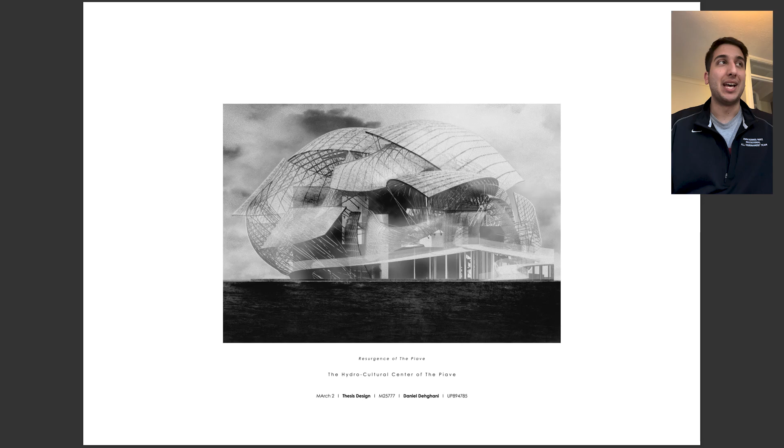So as you guys can see, the title of my project is Resurgence of the Piave, the Hydrocultural Centre of the Piave. And this was such a challenging project at the start, but as we go on, we can obviously see the development that it went through.

So I've got the contents page, the narrative, editorial, site analysis, how a river breathes, design conceptualization, particle simulation, some precedents, project development, some more precedents, and concept progression, proposal testing, scheme progression, materials, and then the drawings: the site plan, the short section, long section, all the elevations, health and safety, fire and accessibility for RIBA and ARB

criteria, environmental strategies and sustainability, technical and structural principles, the landscape engineering, aerial atmospherics, perspectives, and the final collage render I did of the true impact. So we'll see what that is at the end of the video.

So to start with, the narrative of the project, I'm going to read it. I've already read it in previous videos, but I'm going to read it again because it's really crucial. The objective of my scheme is to bring fresh water and sediment from the river Piave into the lagoon. The condition of the lagoon and the health of the ecosystems depends on the influx of sediment and fresh water. Therefore, it is crucial to design a highly sophisticated and well-orchestrated architectural scheme to perform these actions.

The client for the project are the citizens of Venice, to bring the Venetian people together to work on conserving and restoring their lagoon. The clients also extend to fish farmers that live and work on the lagoon. The designated site is within the Venice Lagoon near the village of Capo Sile in the municipality of San Donà di Piave, with the river Sile bordering the land and the lagoon. In order to combat the rise in sea level, it's time for the profession to create interventions which respond to climate change threats.

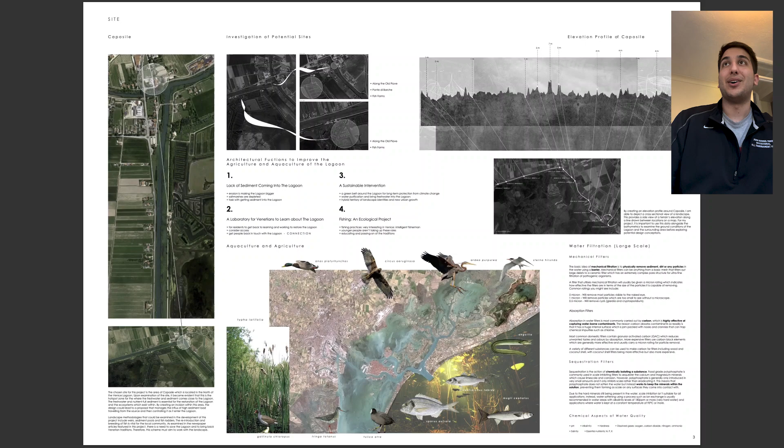Some site analysis, choosing where the best site is for this project, after identifying that this is where the river comes and meets the lagoon, and it's bringing all of that fresh water, all of the sediment from higher up to lower ground. Now this is the optimal zone to bring in that sediment and that fresh water to replenish and restore the ecosystems within the Venice Lagoon, identifying some of the agriculture and aquaculture, the water filtration processes that go on, and an elevation profile of Capo Sile along the river Sile.

Some initial site analysis, a combination of primary research from myself, looking at some of the information online about Capo Sile. In addition to that, the information that we were given from Dr. Camilla Bertolini, who was a guest lecturer in our studio, who gave a presentation on the research that she's been conducting of the lagoon.

And it was very interesting, and there's so much information to just filter out and take what I needed. I mean, effectively I needed all of it, but to be specific to my project and my aims, I took the Lagoon of Venice is in rapid evolution, the stats from that, and the challenge of the bathymetry in the Venice Lagoon as well.

Pictures of my site model, the physical site model that I created, and some additional smaller models that you've seen me make in previous videos.

And finally summarizing this page up by some landscape engineering techniques, the weirs, sediment pools, fish ladders that I've been using and integrating in the scheme that you'll see, and the long-term ambitions of the chosen site, which is to create an architectural intervention that improves the health of the lagoon, work with the landscape to produce a scheme that meets the future needs of Venice,

design to protect and conserve the ecosystems within the Venice Lagoon, integrate the architectural outcome with the existing site to emulate the delicacy and fragility of the lagoon, and finally to produce a design that acts as a manifesto for how design should respond to current and future climate threats.

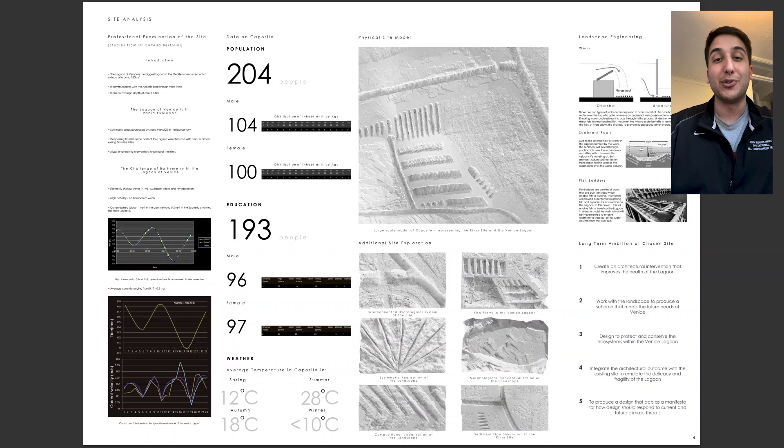And I wanted to create this page of how a river breathes, and it's kind of coming together, a merge of lots of different information that I previously studied, including obviously the site itself, sediment particle simulation, the history of the site, the Piave as a greenfield site, technical exploration of the Piave, and like I said, the river restoration techniques, which I went into greater depth, and there's more pages on that in my design diary, but just for the sake of the portfolio, narrowing it down into much more concise points.

And how a river breathes, and this kind of not famous but infamous in my project, that rivers are surprisingly a large source of greenhouse gases, and water pollution makes their emissions many times worse. So using that statistic to drive the project into how the scheme is very much centered around water. Effectively, it's crazy how we've gone from producing a scheme for people to producing a scheme for the landscape that then meets the needs of the people.

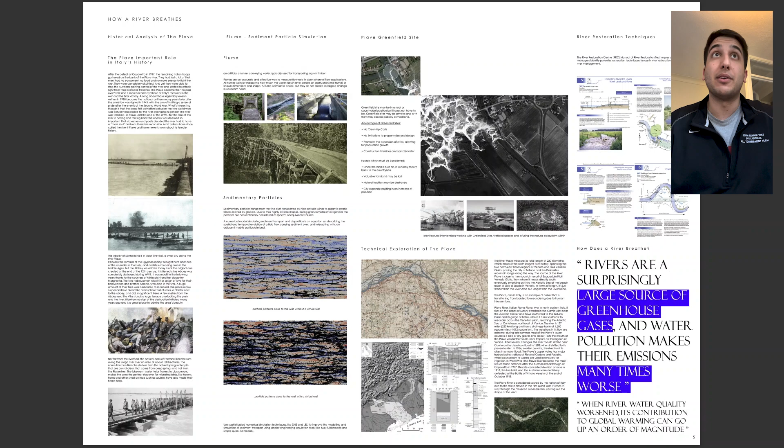And by putting landscape first, the effect from that is greater, and the benefits of that for the site, and effectively, as it says, using the project as a manifesto for future schemes as well, globally.

Design conceptualization, the strategic master plan AXO I did, not really AXO, but the AXO type diagram of extrapolating the data, identifying zones within the river, what they mean, what it means for my project, creating a collage in the Matthew Rangel style, theoretical collages I did earlier on in the project, and of course the one on the right that you can see, this is the key image, the key diagram illustration that I created, that the project was kind of born from, to be honest.

And as it says at the bottom, think global, act local. This is a time in architecture, a time in our world that we need to be working in this way, and in recent decades we have seen this copy-paste culture within housing, this copy-paste culture in architecture. We need to be braver, we need to be putting our ideas out there, and this notion of multidisciplinary and collaboration needs to be stronger, and it needs to work in the best way possible to produce benefits

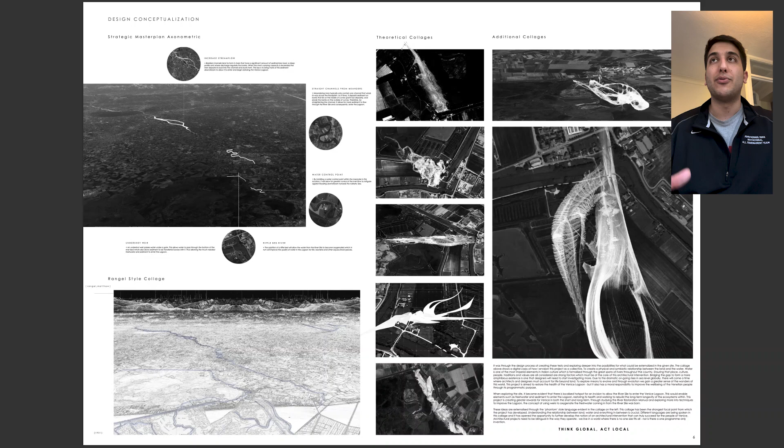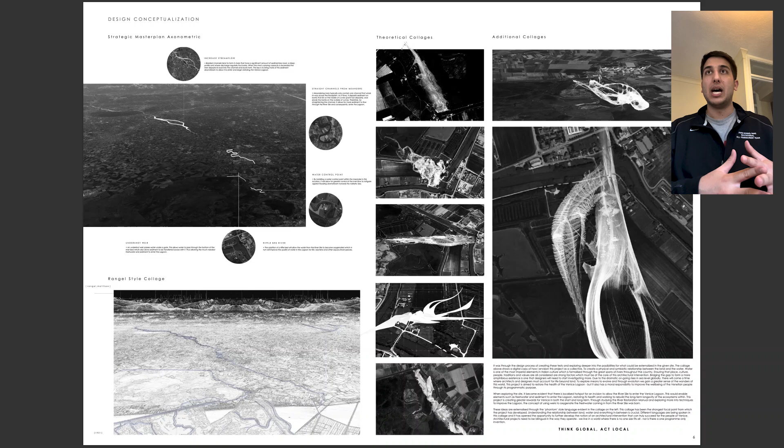for the world. And as we think globally, and how we can bring sustainability, how we can bring all these different factors together, especially when it comes to construction as well, the choice of materials, the choice of techniques in order to build the buildings, we need to have lots of these mini projects going along all around the world that work together in a way.

Yeah. Particle simulation, you've already seen me discuss this in previous videos, and that process, and how that also led on to the factor of sediment flow and sediment pools, which are going to be important for my project. And it's all about the process the water goes through, and not only that, but the tool that water is in this project in order to bring that sediment. It's acting as a figure of transport and a figure of connection between, yes, land and water, but it's a connection between the current state of the lagoon and the future health of the lagoon.

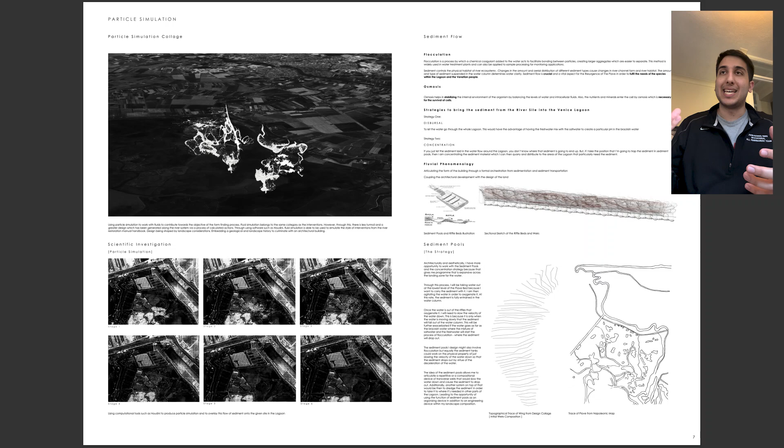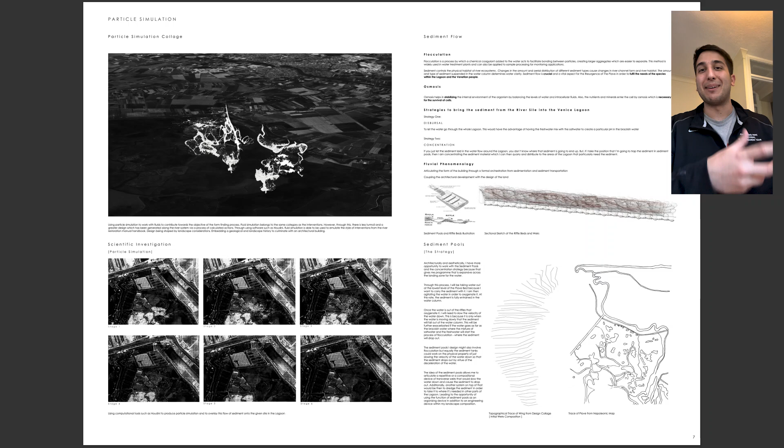And this sediment is coming to replenish the lagoon, and it's so important that earlier on in the process I found a way in order to extract and bring in the sediment, bring in the fresh water, and then architecturally, how can I articulate this into a building, and what does that mean not only for the people but for the site as well.

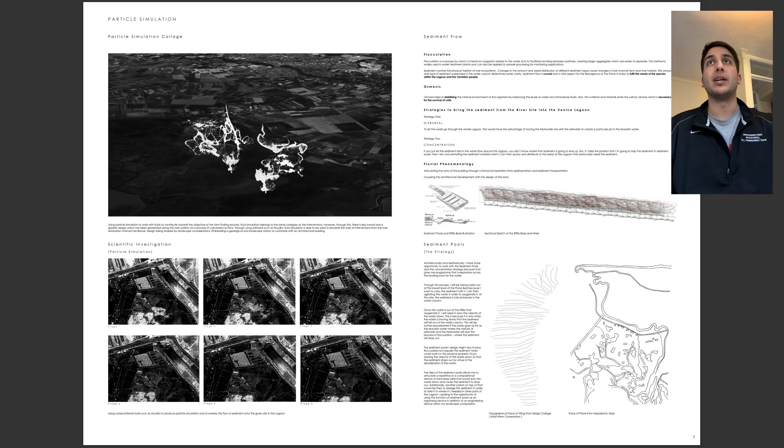Undertaking some initial precedent studies of AMID.CERO9, the projects that they've been conducting at their firm, I think is quite extraordinary, and really trying to look at these three separate projects from a couple of different angles. Firstly, being artistic and aesthetic: okay, how is this working? How is it actually relevant to the site? And what are the architects trying to convey?

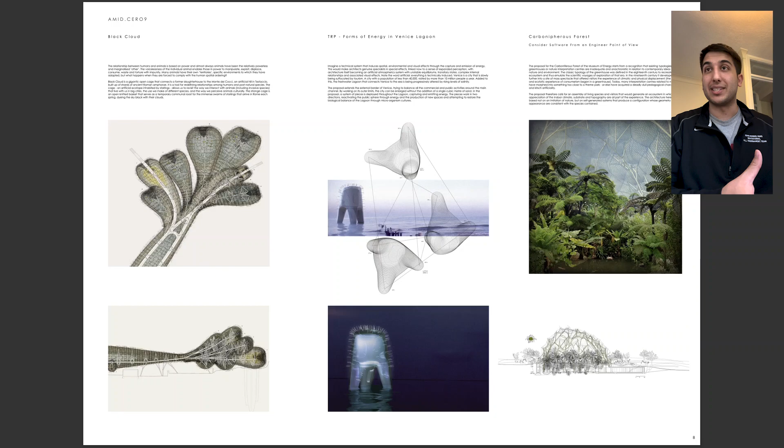And secondly, scientifically and technologically breaking apart these projects. How are they being embedded in the site? How do they work? What is the formula, the equations that are going on in order for these to operate effectively? And what can I take from that to benefit my project moving forward?

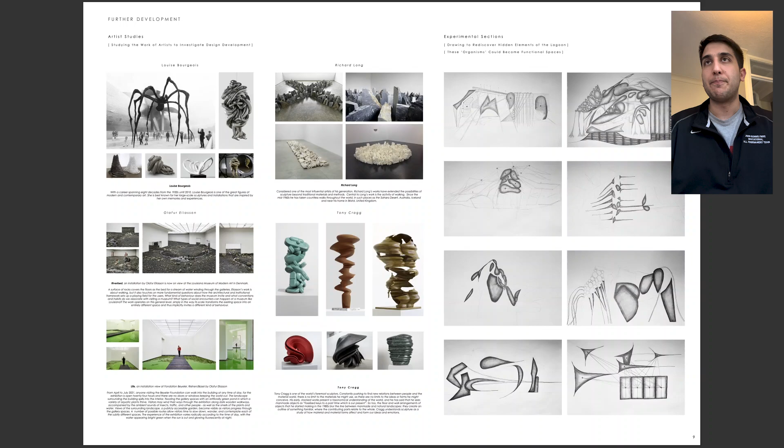Further development, looking at the work of artists, looking at the work of sculptors, then conducting my own investigation into how I can be visualizing some of these spaces, as you can see on the right hand side. And then again, experimenting through layers. This was such a long process within the project. Testing, trialing, putting these layers on top of each other. What do they mean? What does this convey? And what is it about this information that is truly going to be benefiting the scheme as a whole?

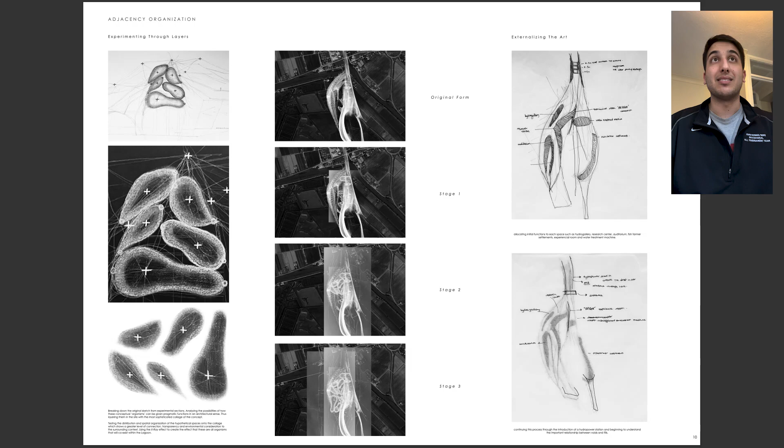And once you understand that, by not limiting myself in the earlier stages, I think this led to greater creative flow and creative growth. And creative growth also led into the scientific elements that I then explored later on throughout the year, that then led to all of these different aspects, all of these different elements culminating into one scheme that works, in my opinion, quite cohesively.

The programs: we have the lobby, the cafe space, research center, museum of flooding, education hub, auditorium, and the fish farmer settlements, and the landscape aspects of this project being the weirs, the sediment pools, and the fish ladder, that are all going to be working in harmony together to effectively work as the manifesto of my project, and to complete the ambitions and the aims of my project, which were to restore the health of the ecosystems within the Venice Lagoon.

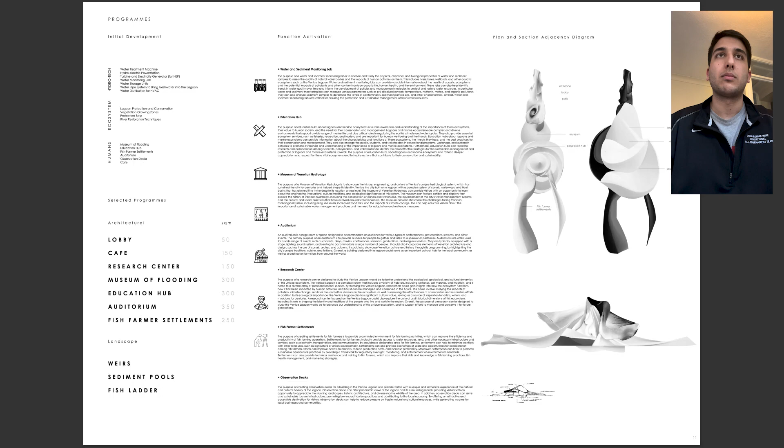And I was trying to do some abstract plan and section adjacency diagrams earlier on to identify these zones. And once a form was created, I used it to slice through and look at the volumes in different ways, analyze them. What does it mean? Spatial organization diagrams, using the Rhino model to look at the form, and how can I cut this up. And I created, as you can see, the volumetric sushi section, as I called it. And this was another key point in the project.

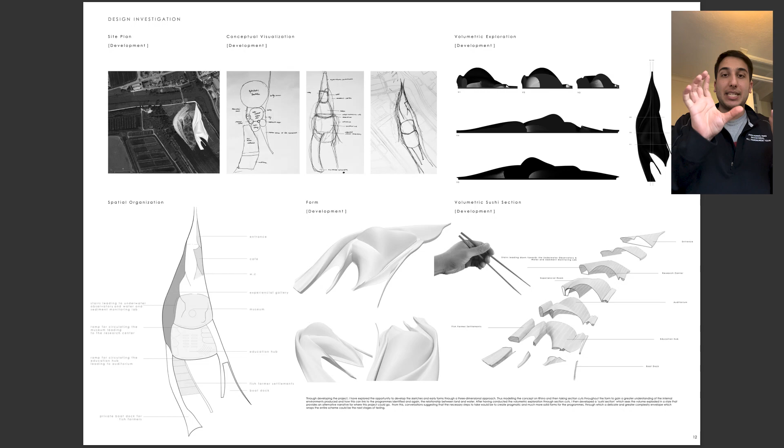Yes, I didn't go with this form, as you'll see in the next slides, but by cutting up the volume, this then led to another factor, which was a breakthrough point. Let me just quickly say before I move on to the LV Foundation, by breaking up this volume and seeing it in different segments, my tutor then had a discussion with me to say, you know what, now is the time that you have to think much more pragmatically. And what he means by that is designing spaces that aren't going to be structurally complicated to construct. And of course, the limited time we have in architecture school to design as well.

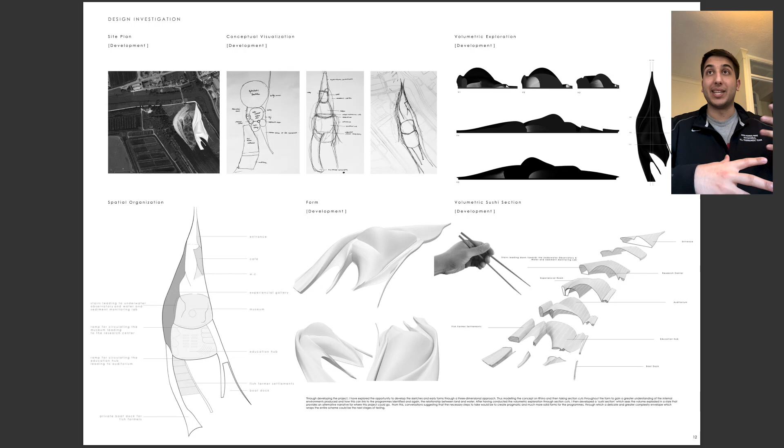So think of the spaces much more pragmatically, but think of possibly the envelope of how this is going to be delicately wrapped, so that you could then bring back these notions of fragility, delicacy, etc. And this was such a, I don't want to keep saying breakthrough, but it really was a key part of my project, the LV Foundation. The way that Gehry designed this incredible building, in all honesty, I took for granted the first time I ever saw this building, and the first time that I was truly exposed to the drawings.

I mean, I was exposed to the drawings years ago, but studying them this year for this project was a completely different level. The way that the project has been engineered is truly out of this world. Using the building as one huge, large foundation, which then inhabits everything else, and is then not covered but wrapped and dressed in this envelope that is so beautiful, is mind-blowing.

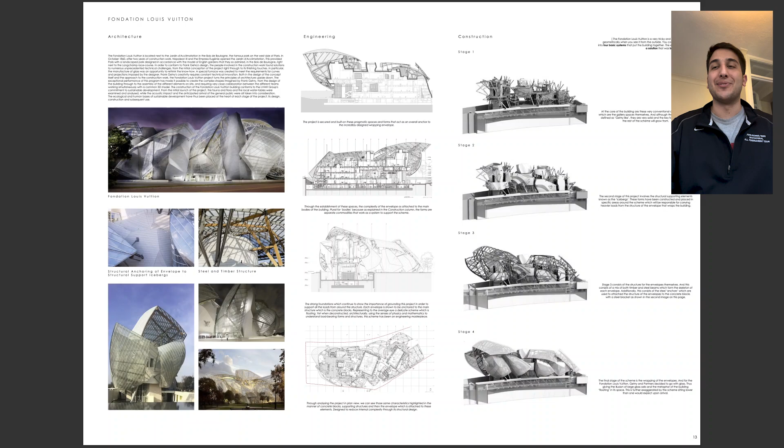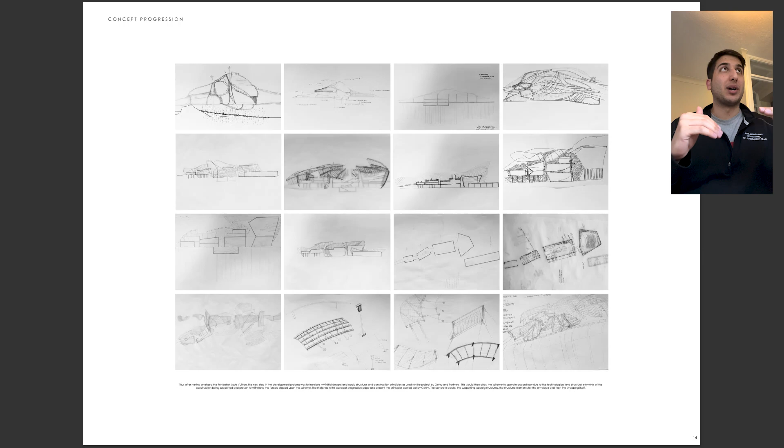So yeah. And then this led to the concept progression. What's meant by that is much more development, sketching, going back to the earlier forms of the volumes that I broke up, deconstructing those, as you can see, the initial plans that I created, working on those plans, looking at it from a completely different perspective through section mode. And then of course some quick illustrations.

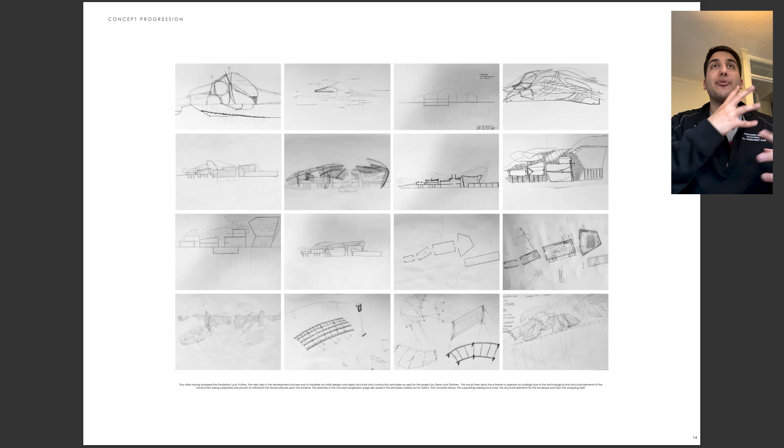There's more in the design diary, but keeping it concise for now for this presentation, into the structure and how it was put together, and how I can then emulate factors of Gehry's LV Foundation to best suit the needs of my project. And this led to the proposal testing.

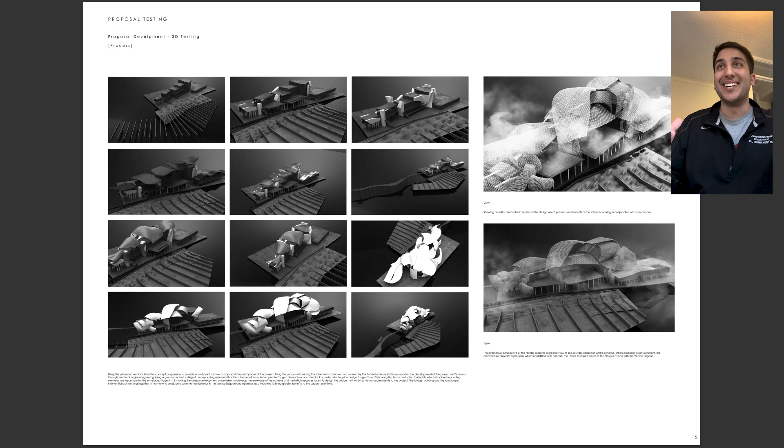You can see the iterative process that it has gone through from the concrete blocks. We see the icebergs being constructed, and a lot of time was given towards the wrapping of the envelope, and how this is then going to work in harmony with the landscape engineering aspect of the scheme that I've been introducing. This took a long while. This took quite the journey, back and forth, and some very, very long days, some very, very long nights, but we got it done.

And as you'll see in the final images and renders, I am pleased with the outcome of the project, and introducing the bridge as another form of entrance to the scheme is, how do I say it? I'll just say the cherry on top, in a way.

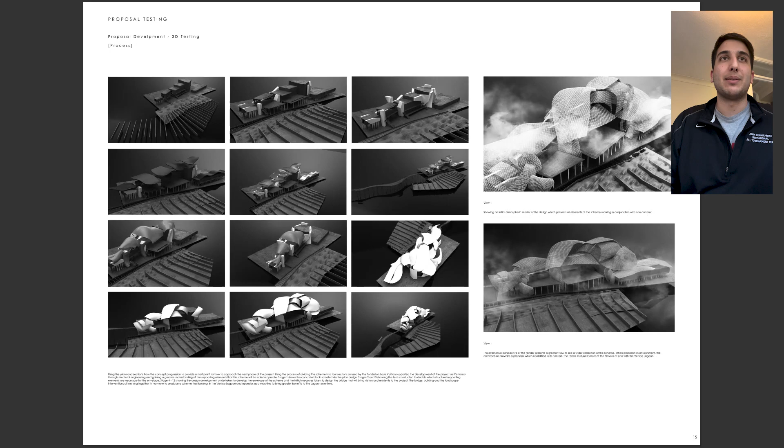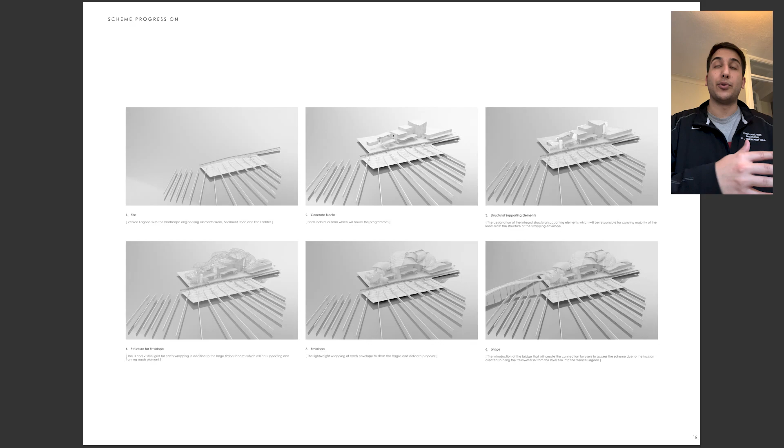And yeah, the scheme progression, again, seeing the site, the concrete blocks, the structural support elements, structure for the envelope, and then the introduction of the bridge, so that the users and visitors can enter at 2 different levels. Same experience, but obviously if you want to start on the ground, on the ground slab, you can. You don't have to go directly straight into the lobby. And it also provides an alternative route of entrance and exit, both for normally exiting and for fire escape means too.

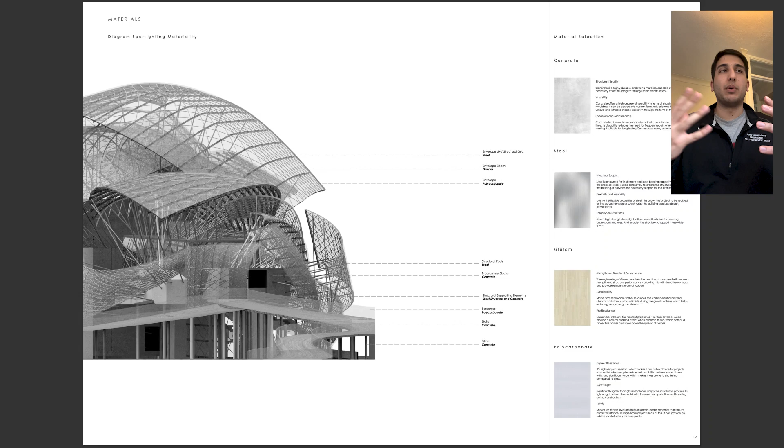Materials going with concrete, steel, glulam, and polycarbonate. There was a lot of talk between me and my tutor about using ETFE, but the cushions, the bubbles of ETFE just would not fit within the fragility and delicate aesthetic that I'm going for. So we move on now to the site plan. We can see the scheme in its location in the Venice Lagoon.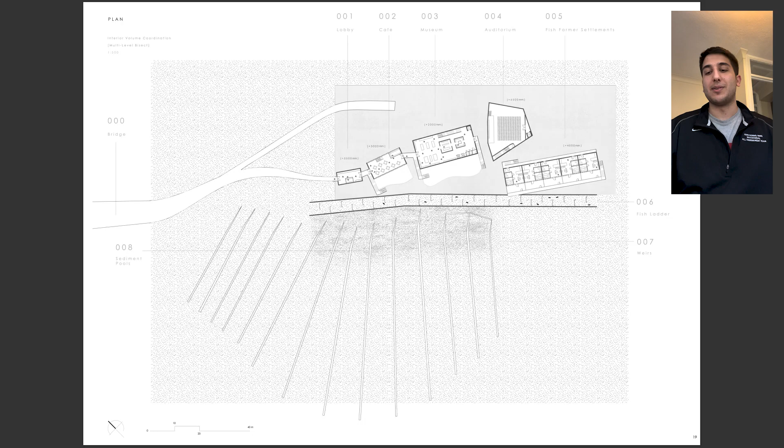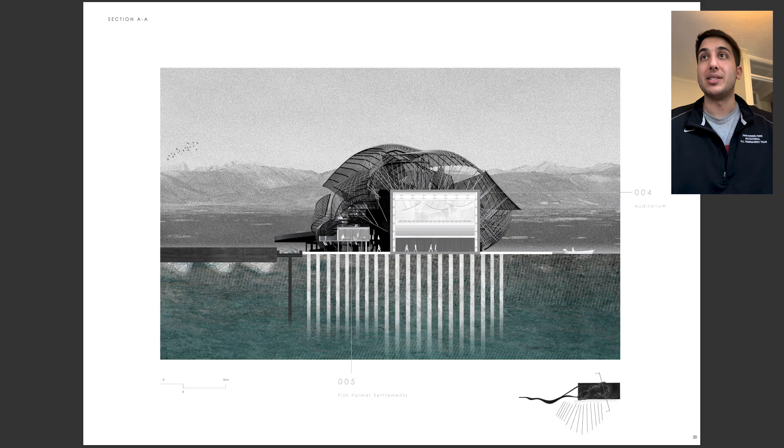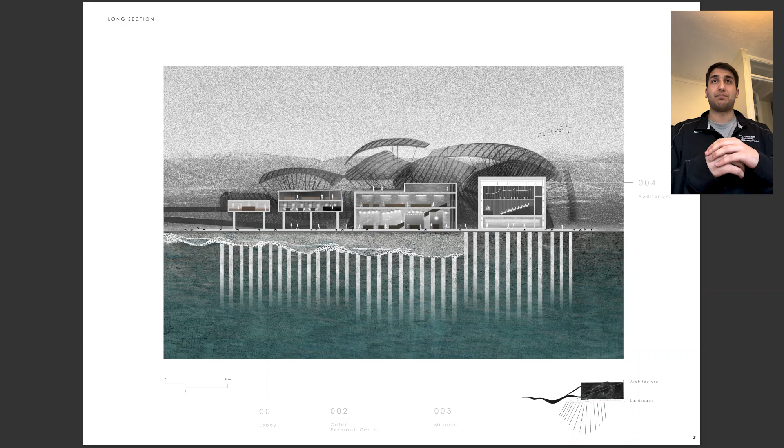And the long section now showing much more of the landscape. We can see the process of the riffle beds, the landscape engineering going on, the foundations of the building. Let me just double check. Yeah, you can see the foundations, the wrapping of the envelope. You can also see that in its entirety, and I think that's what also makes this project so beautiful.

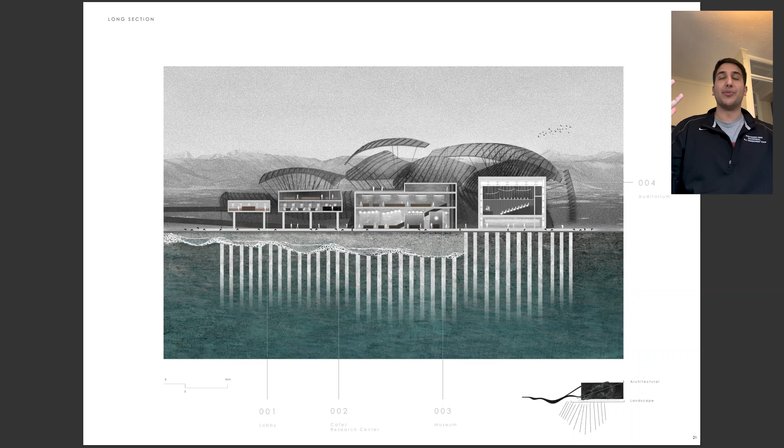It's at different levels that people are experiencing, even when they're outside, when they're on the ground slab walking around. They can see all of these different layers of the building, and it's the same process of all the different levels and all the different processes that the water has to go through to be filtered, bringing in the sediment, bringing in the fresh water. And I think all of it, the architecture and the landscape, truly just works in harmony.

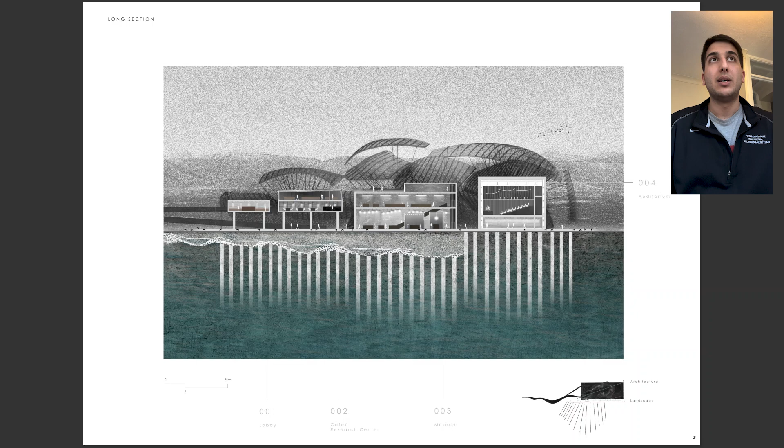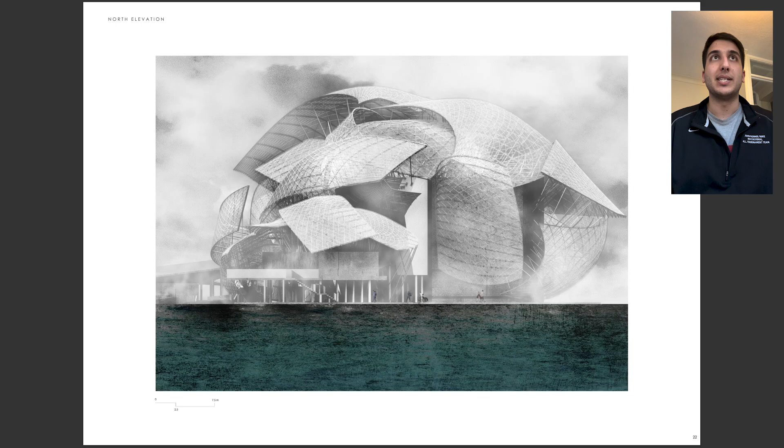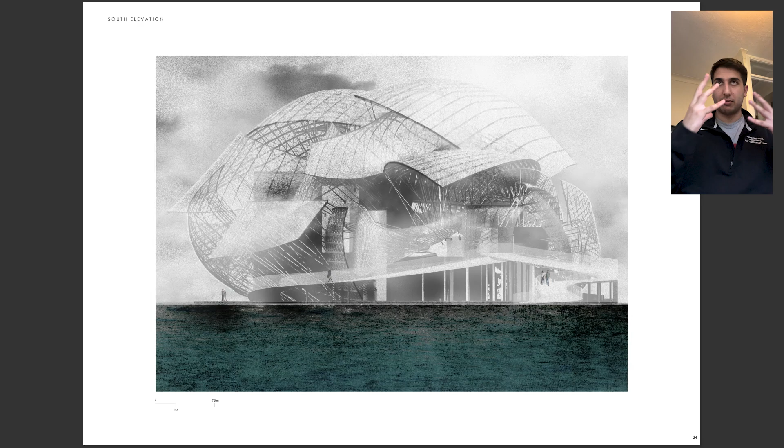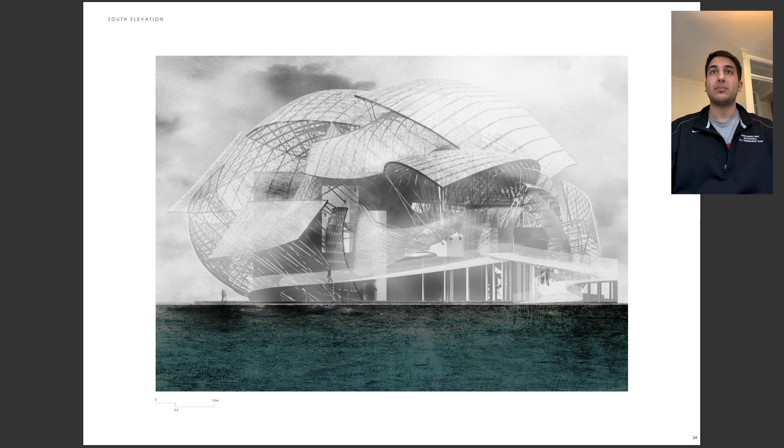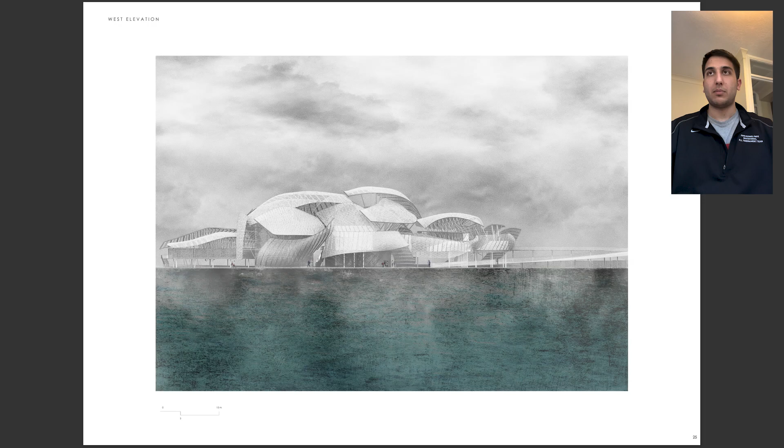The wrapping of the envelope. We can also see the structural elements of how the envelope is actually attached to the structural support elements and the concrete blocks too, and how people will be experiencing this in terms of scale. And the west elevation too. This is overlooking the lagoon, so we won't be able to see anything on that side, but it's creating this atmosphere of a foggy experience. I think this aesthetic works quite nicely.

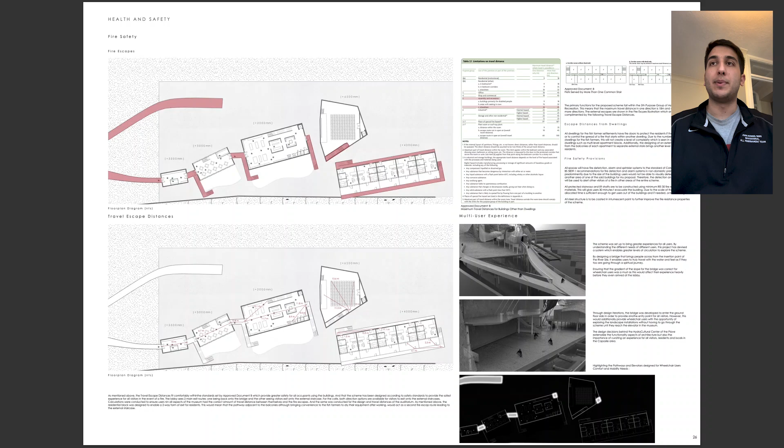Now moving on to the final bits, which is the health and safety regulations, travel escape distances. Looking at the Approved Document B and the multi-user experience diagrams I created. Environmental strategies and sustainability, so solar testing, explaining the reasons for the PV cells and how some elements of the envelope will be covered in thin film PV cells that will be generating electricity for the scheme.

The landscape, explaining again the fish, the sediment pools and the weirs, the ventilation, some cross ventilation happening, and of course the water collection system at some of the envelopes, bringing in that rainwater, which can then be reused for a couple of different purposes, such as washing and cleaning. The choice of materials, and then a small statement about the smart proposals that I'm going to be introducing to the scheme as well.

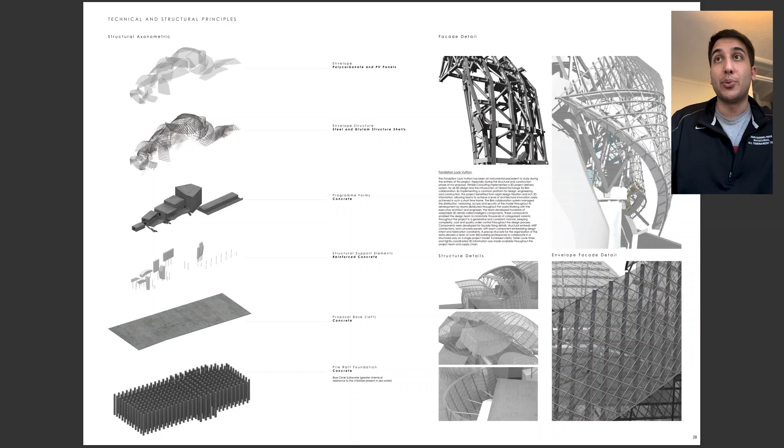The technical and structural principles, creating a structural axonometric of the different stages and parts of the scheme. The facade details, again referencing back to Gehry's LV Foundation and the structural details and envelope facade details of my own project. The landscape engineering, going back to those same three elements, and then showing this illustration of the sediment influx process, how the buildup is dredged by diggers and can then be reused in other parts of the lagoon.

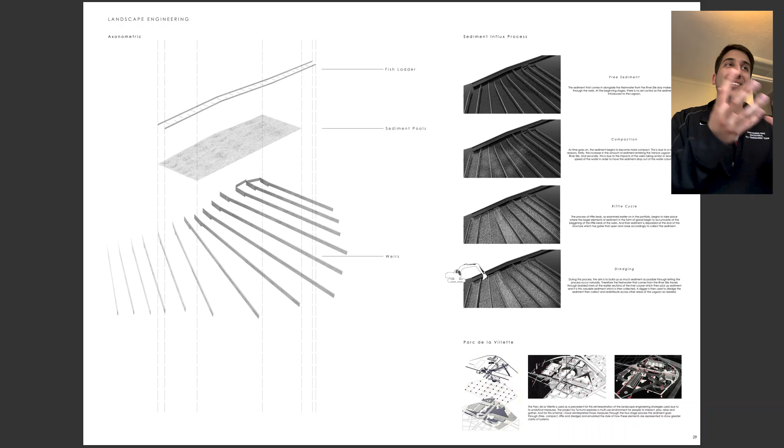Referencing quickly the Parc de la Villette by Bernard Tschumi, and not so much the project itself, but the way that the project has been represented in the drawings. That is something that I think architecture students aren't so highly exposed to. Yes, projects and their outcomes, but mainly how they're being represented, and how you can use representation styles for your own project despite the theme of the project being something completely different.

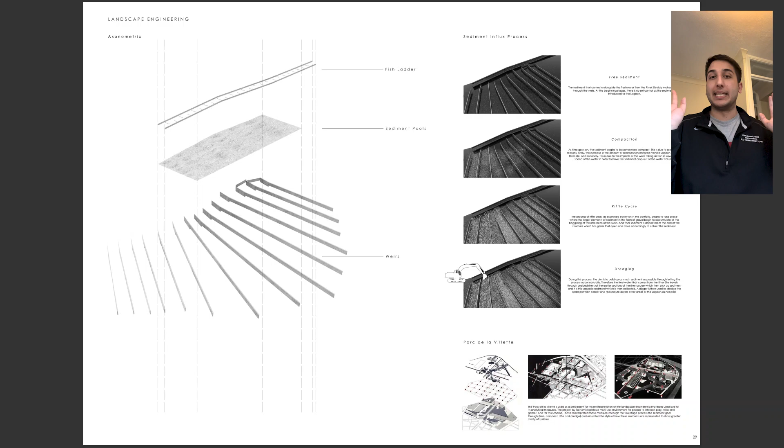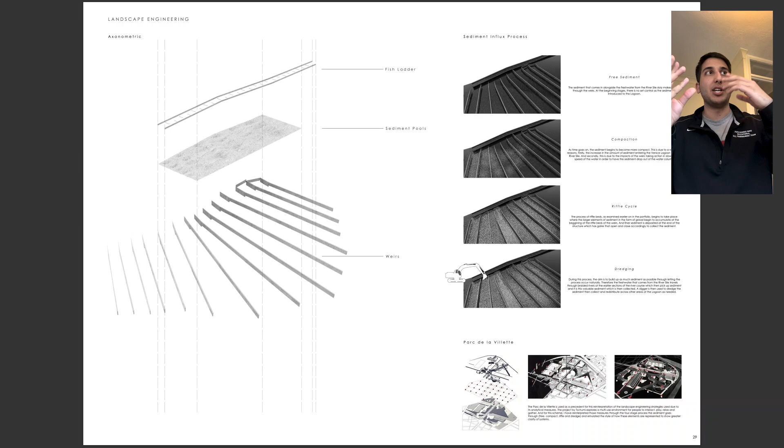And I think that's quite amazing, to be honest, how architects and designers as a whole can use another artist's work, not necessarily in relation to what they're trying to achieve, but in how they represent it and communicate it to an audience. So I just wanted to include that as a reference as well. And now we're moving on to my favorite part of the project, and my tutor constantly goes on about how I love to spend lots of time doing these drawings.

But this year I literally did not spend that much time doing these drawings, because a lot of my time and focus was placed on the architecture, on the engineering, the landscape engineering, and oh my god, Rhino and Grasshopper were just playing up this year, so that was a lot of my time and focus.

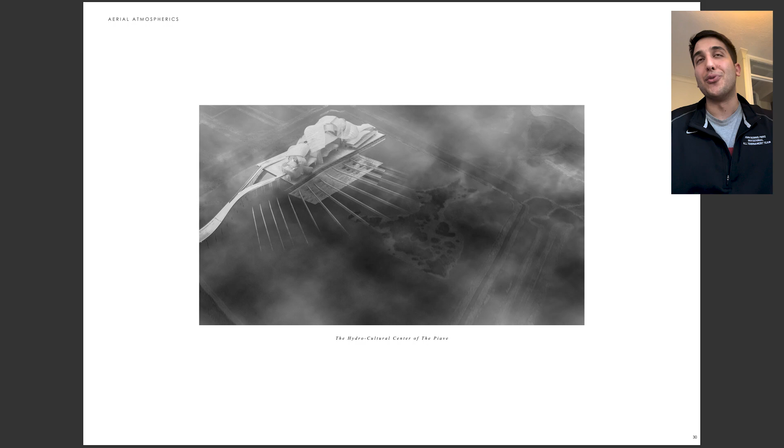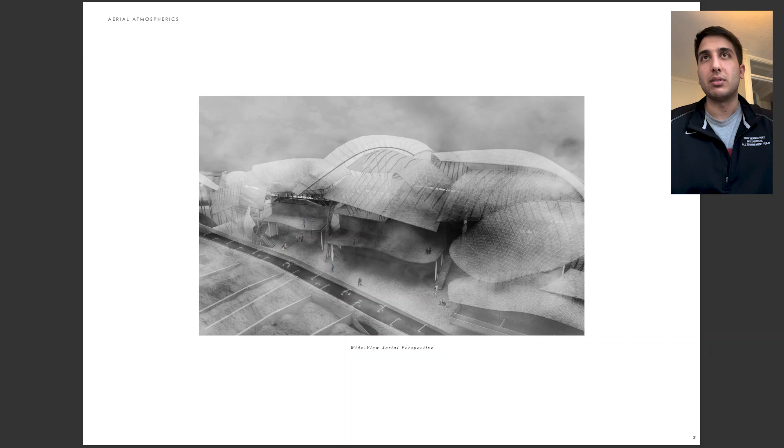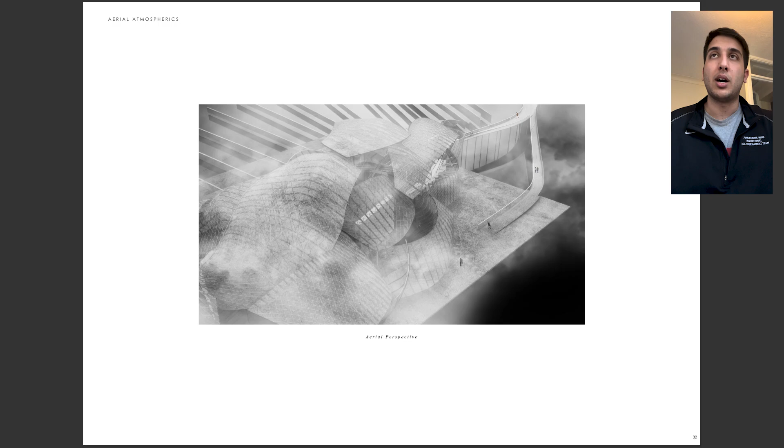So the aerial atmospherics start off with the first one, the hydrocultural center of the Piave, showing an overview of the project. The wide view aerial perspective where we can see many people experiencing the scheme, and the fish ladder and the weirs coming in. I think it looks quite nice because of, again, that fog, the atmosphere that I've been able to create in this process. Another aerial perspective where we can see people entering from the alternative route through the other ramp bridge, coming down towards the ground slab.

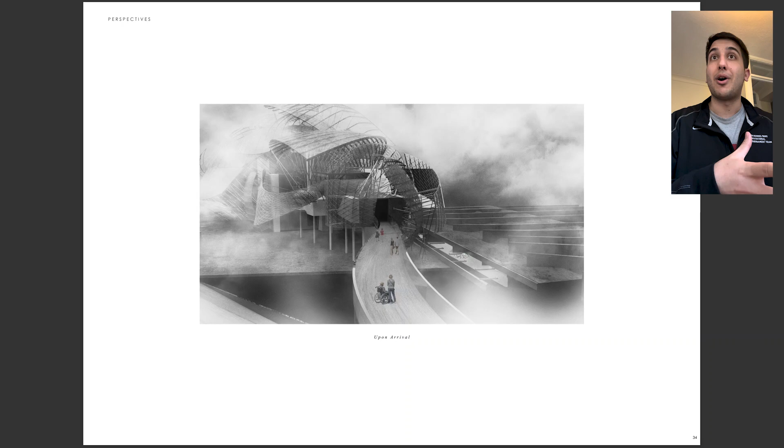Aerial perspective, the view from the fish farm settlement. Again, I think it's been constructed in a way that provides the optimal experience for all users of the space, whether you're a visitor, a fish farmer resident, or a resident of Venice coming to check it out. Upon arrival, I really did like this perspective, because it provides a greater understanding of what it's like to actually experience the scheme as soon as you arrive at the very front, like the start of your journey with the project.

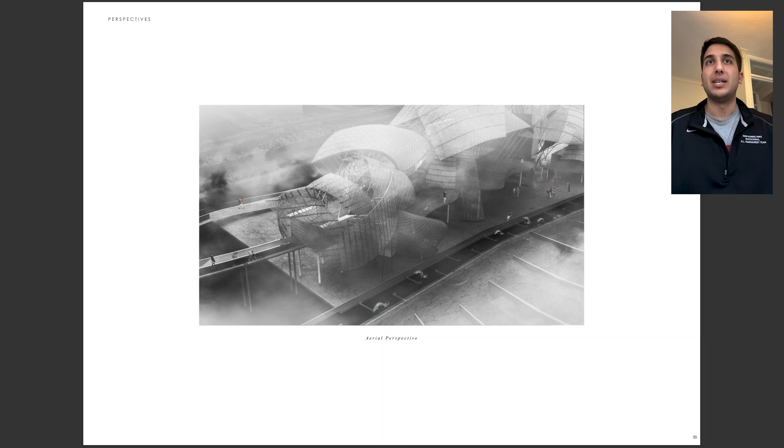Aerial perspective again, showing an alternative view, the fish ladder showing the fishes jumping up through the process. Bit of the lagoon in the background, and again bringing in that atmosphere to truly show off how delicate and fragile this scheme is with its environment.

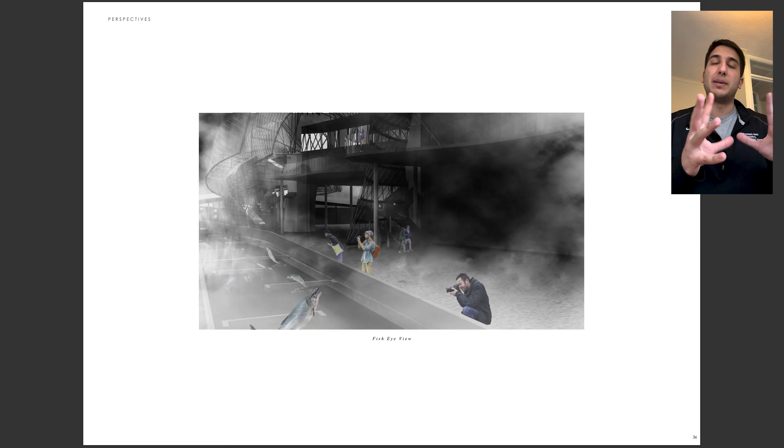Yeah, I called it the fish eye view, not technically a fish eye view, but I wanted to bring it to a much smaller scale, much more close up of how the users will be experiencing these spaces, and the scale of these spaces too, because from a site plan drawing they seem quite small, but as you come closer, you actually see how big these spaces are in terms of human scale.

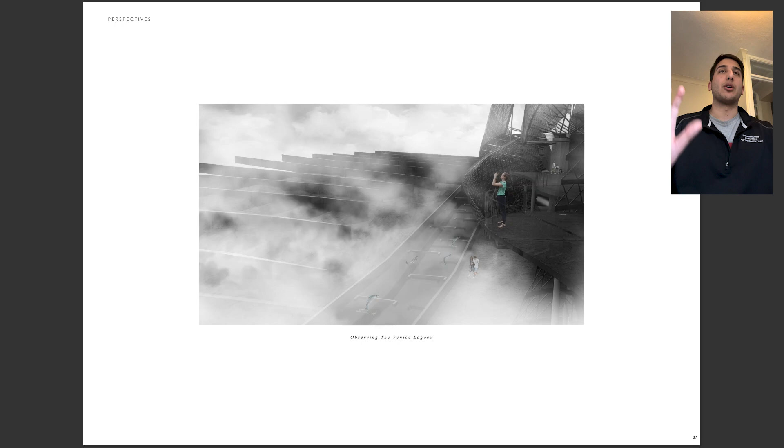Observing the Venice Lagoon, there are one or two people we can see on the not really balconies, my mind's gone blank, but on the extended spaces on the exterior, which are still attached to the forms of the concrete blocks, and the amazing view that they're going to have, looking at this whole process of the water coming in, filtering it away, and releasing that sediment, and we can see the buildup of the sediment, all of these factors working in cohesion with one another.

And I wanted to finish off this project with the final slide called the true impact. What I meant by this was, I wanted to divide the collage into two sides, one being 2023, which is this year, and one being 2123. The final statement that I made is, when it's all said and done, we will be remembered by the actions we took as architects in how we were able to combat social and environmental issues. It's time to turn the tide.

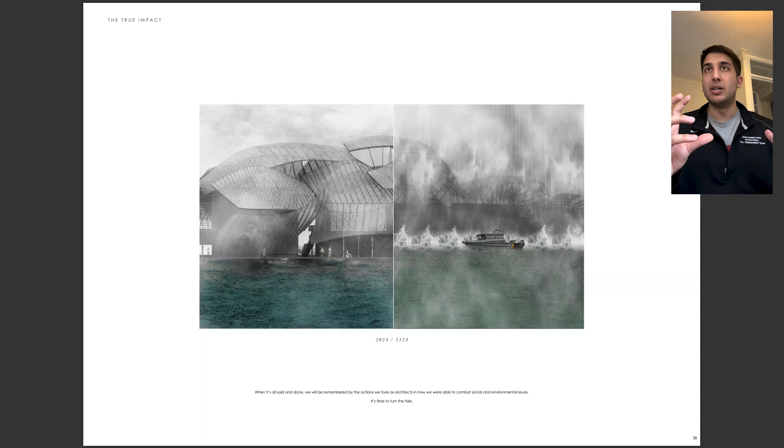But if we don't take the actions, architecturally, environmentally and socially, then we will see the rise in sea levels, we will see weather conditions getting worse, stronger winds, much stronger and harsher rainfall as well, and how this is going to be impacting the spaces that we live in right now. And it's time to open our eyes to the fact that there are schemes out there right now that we can see aren't working.

There are projects happening right now in design practices that just aren't going to be beneficial for the future of the environment, and we need to take a stand, and we need to truly understand the repercussions of the work that we do right now.

So with that, this is the 40-sheet summary of my final year project. I've got my design diary, of course, and the 2 posters,

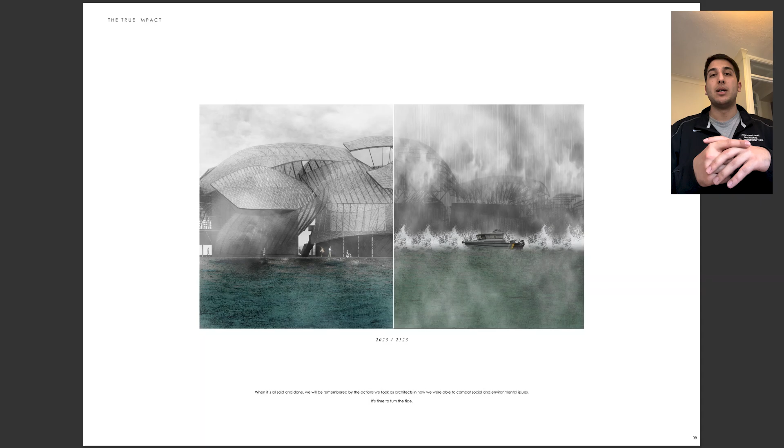But apart from that, it's quite strange that the year's finished, uni's finished, the masters is complete, and yeah, right now it's just applying for jobs, chilling out for a bit, of course, but applying for jobs and seeing what the next steps are.